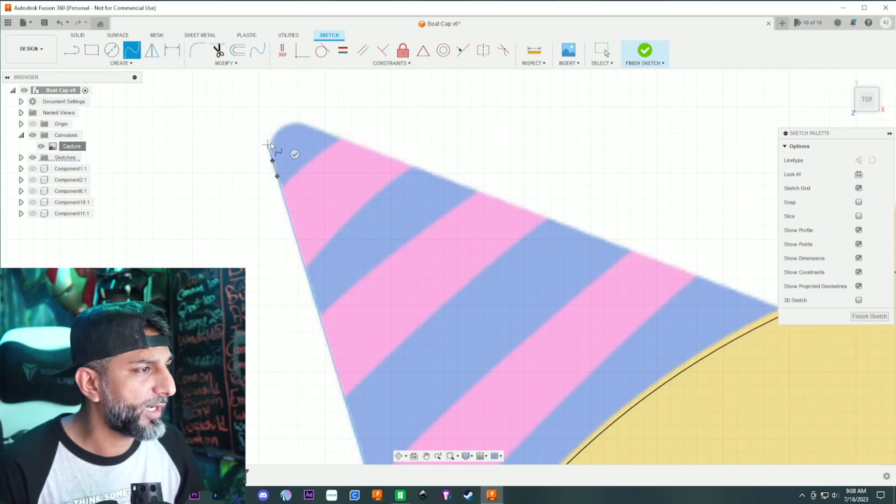I'm gonna hit this right here, and go probably about to like right here, and then hit the check mark. Then I'll pick this tool and just start kind of building my curve around it, and just like that, go over here.

Now these tools, we're going to utilize the mirror tool to build this, because what I'm going to do here is build the eyebrow, the eye, and the cheek on one side, then mirror it on the other side, and I'll show you guys how to do that.

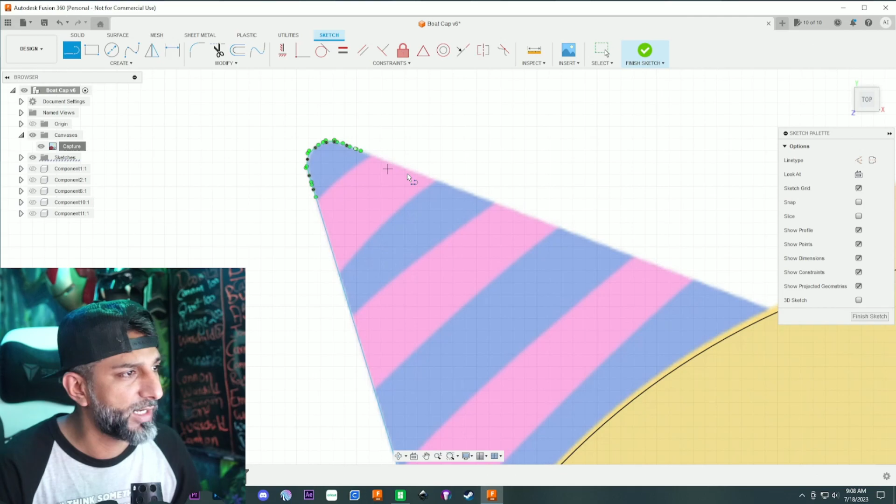I'm going to go back to my line tool, pick that, and bring this all the way down here. Now that we got that, I'm going to use this tool here, and from one side we're just going to kind of keep going.

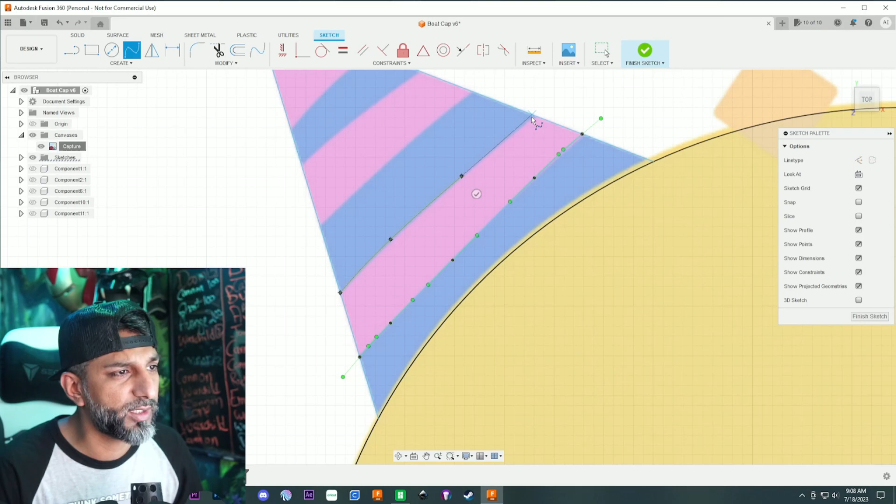I'm quickly showing this to you guys because I've already done this, but I felt like this was a pretty good design to quickly go through some of the basic things in Fusion of how to design something if you don't have a template or an outline to build it into an SVG. So those are my lines right there, and then this guy here.

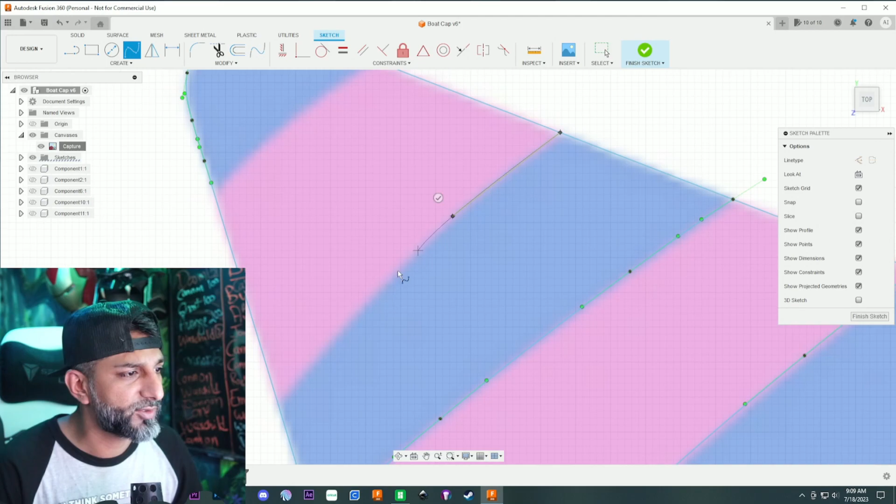As you can see, as long as you're getting it somewhat close, you're good. And boom, okay, so that's that right there.

Now I'm going to show you a quick thing of how I do these squares. I'm going to pick a line tool, go from here, go here, go here, over here, and probably over here.

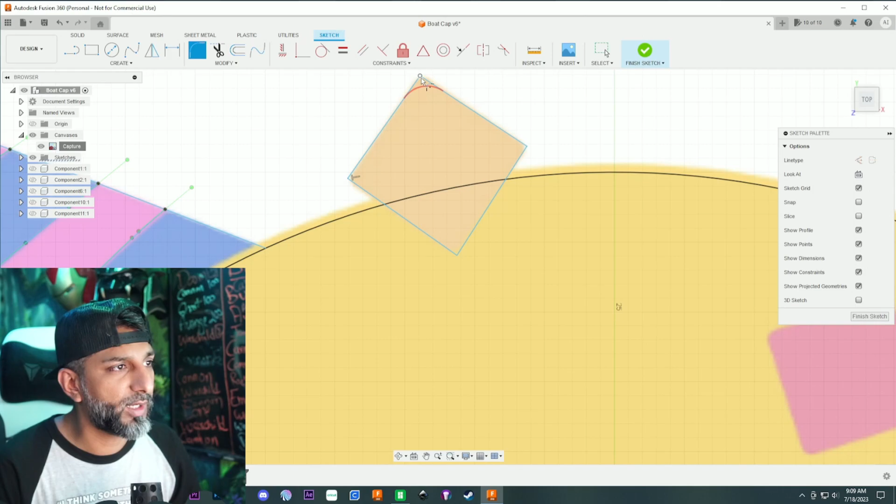And then I'm going to finish this off right there. Okay, then I'm going to take this fillet and round this corner a little bit. Okay, about how that square is. So right about, I think, there. Okay, then I'm going to click the other corner, then this corner, then this corner, and that gives me that nice rounded square right there. So I'm going to hit enter.

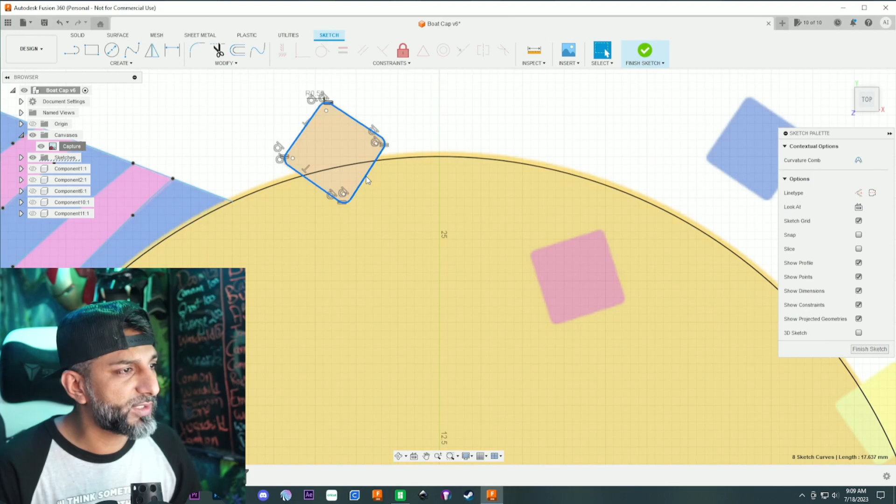Okay, now I'm going to double click the square. Okay, and I'm going to do Control C for copy, then Control V as in Victor. Then I'm going to grab this square and bring this here. And then I'm going to rotate it, right about there, and then bring that square right there. Hit enter. Perfect. Okay, now I got another square here.

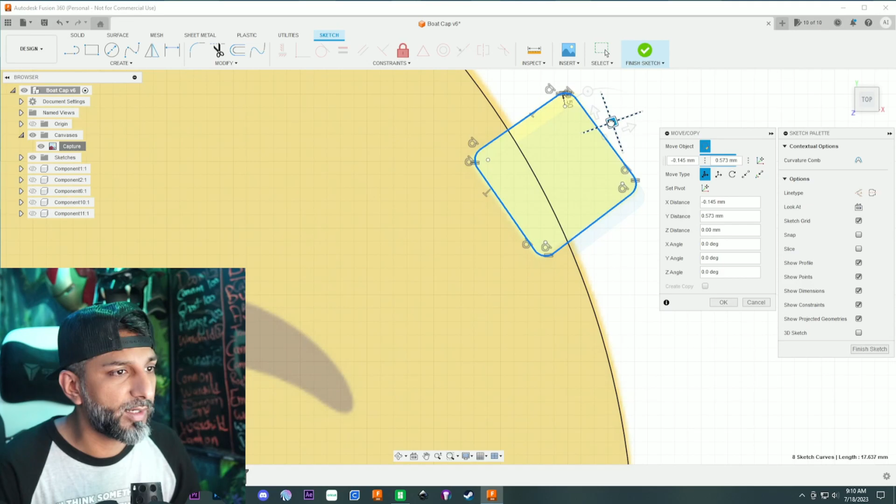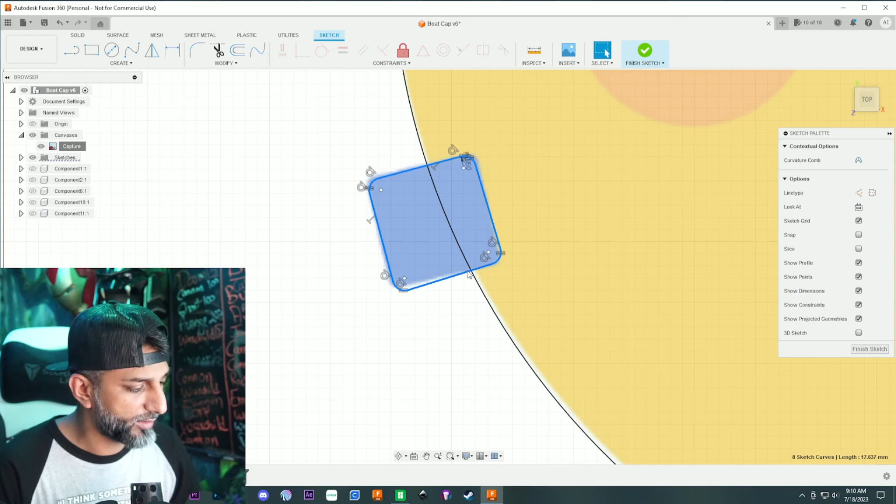So I'm going to click that, double click it again, Control C, Control V, bring that here, and then rotate, and then bring that right about there. Hit enter. Then I got three more, right? So double click that again, Control C, Control V, bring that guy here, and then rotate right about there, and then enter. And then C and V again, bring this down here and rotate, and enter. And then do that again, Control C, Control V, bring that here, and that's good right there. Okay, perfect. So now we got all the squares done.

We got the outline kind of done. All right, so let's build this eyebrow real quick, and I'm going to show you how we mirror this. Okay, so I'm just going to click. For the sake of the argument, like I said, I'm just going to kind of quickly design this, but you can kind of see how it's taking the shape of it, right? So there, boom, finish that.

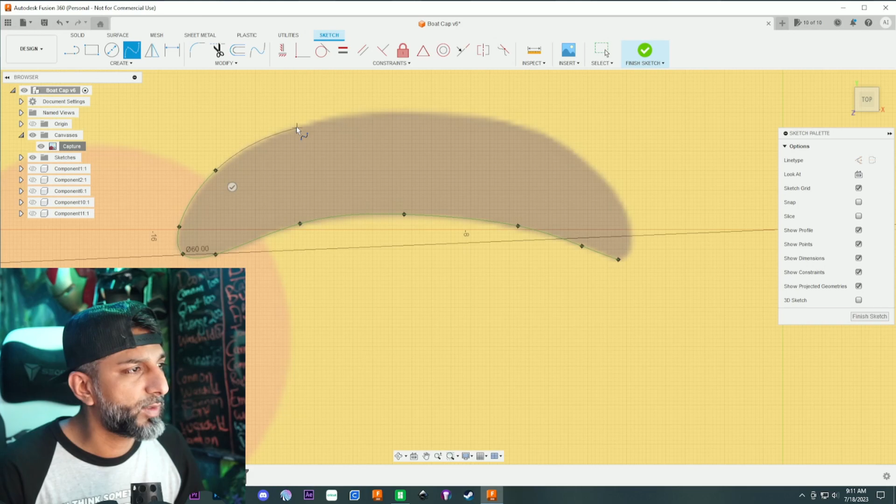We're going to come here, over here, and you know what? I'm going to time this too, to see how long a simple design like this really takes in Fusion. Because I used to be really scared of Fusion. I mean, Fusion used to scare the crap out of me, and I would do everything in Tinkercad if I could. And if I didn't have to touch Fusion, I wouldn't.

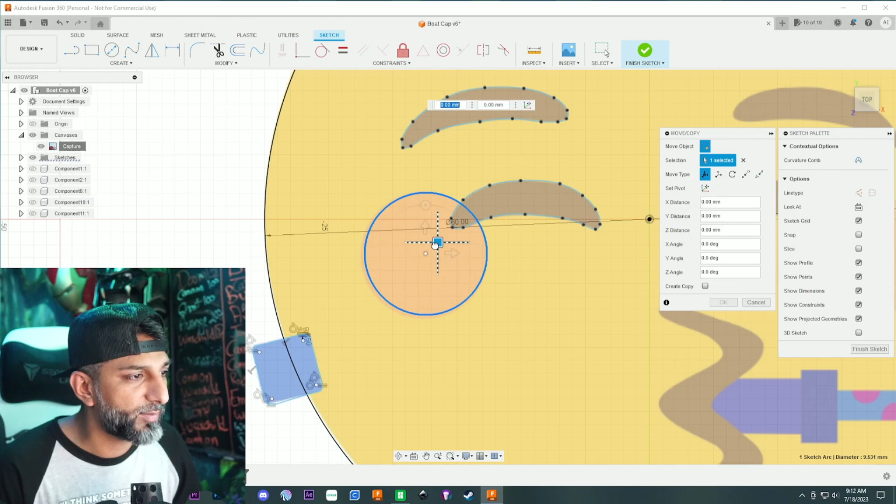So now that I built the square for the cheek right here, I'm going to select it and move and copy it, kind of lining it up pretty good with the cheek right there. I'm going to take this trim tool and trim this part of the cheek right here that goes inside. Okay, now here's how we do the mirror function.

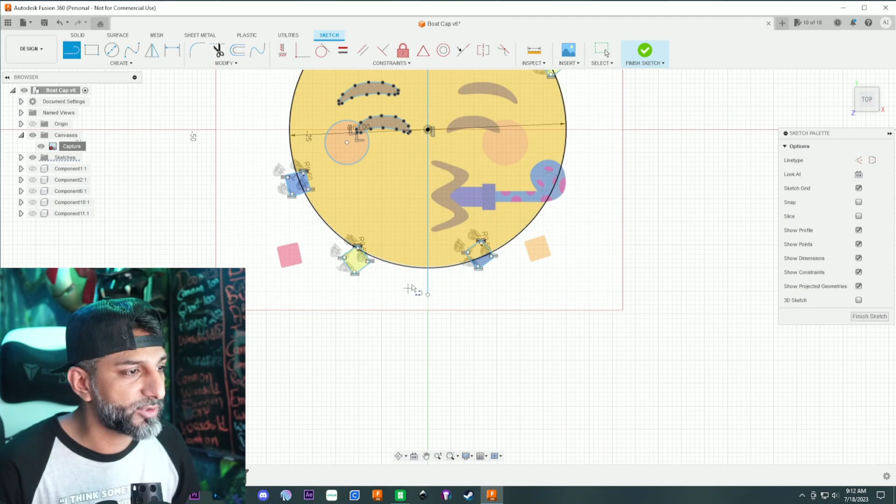So I'm going to take a line because we need a reference line where it's going to mirror. We're going to take that line and put it right through the center. Just put that line right there and hit the check mark. Then we're going to pick this tool right here, mirror, and put our objects 1, 2, and 3, and select our mirror line, which is this. And as you can see, it's bringing that right there.

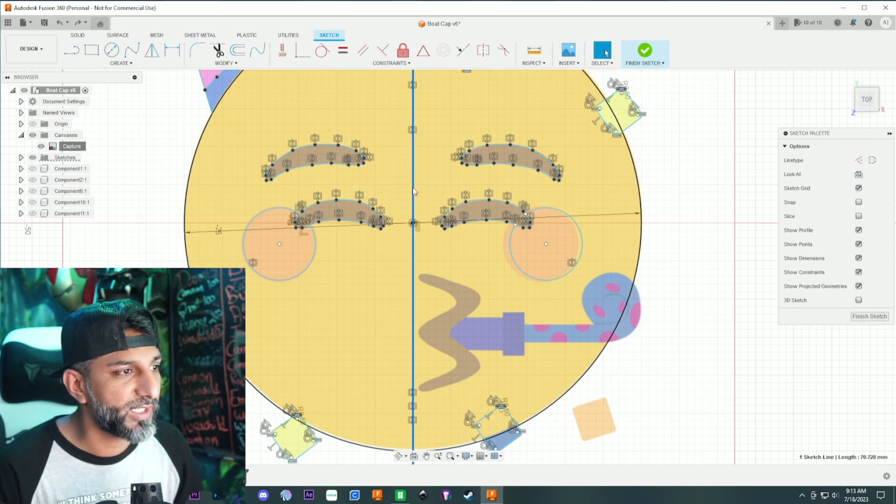Now it's not 100% there, but I'll show you how to move it. Hit OK. Now, if you try to pick this and manipulate it anyhow, like move and copy, because it's a mirror, the other side will move too. You see that? So here's how we get away from that. We're going to take our reference line that we made and just delete it. Now we can move it individually. You see that? All right, we got that right there.

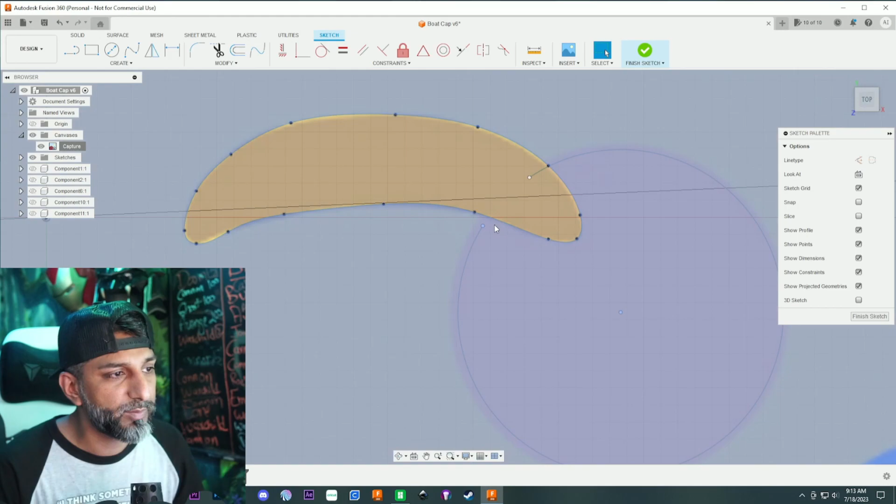This one probably right there, and this one probably right there. Okay, but now I got to make sure, because I moved it, that my lines are closing over here, right? So I'm going to click and click, close that line right there, and that line's already closed. I'm just going to trim it right there. Okay, perfect. We got the eyes, we got the cheeks, we got the squares. The only thing left is the mouth and the little blowy thingy right here.

So again, we're going to pick the squiggly line thingy right there, and then we're going to go here, quickly design this thing.

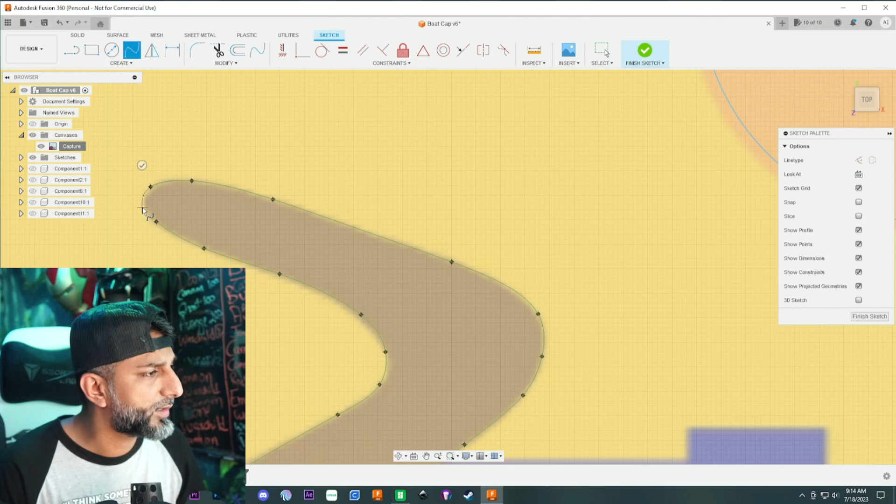Fusion isn't so scary, but like I used to be scared of doing this sketching thing. Once I got the hang of the tool, it's not so bad. Bring this here, and boom, right there. Right there, there, and we're almost done with the mouth. Probably gonna bring this right there, and right there. Boom. All right, we're done with the mouth.

Okay, now I'm gonna pick this line tool and go from here, down, down. And then I'm going to close this right here because these are the two different blues that I'm going to put over here. Over here I'm going to put a lighter blue. Over here I'm going to put a darker blue.

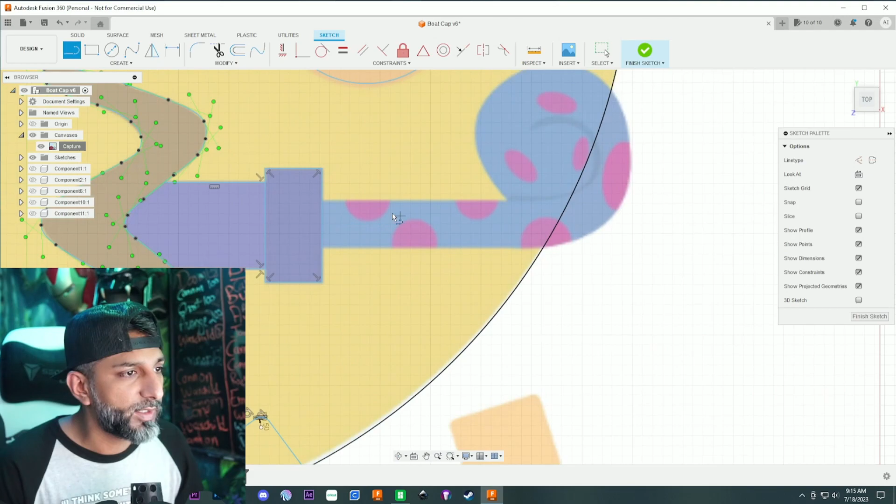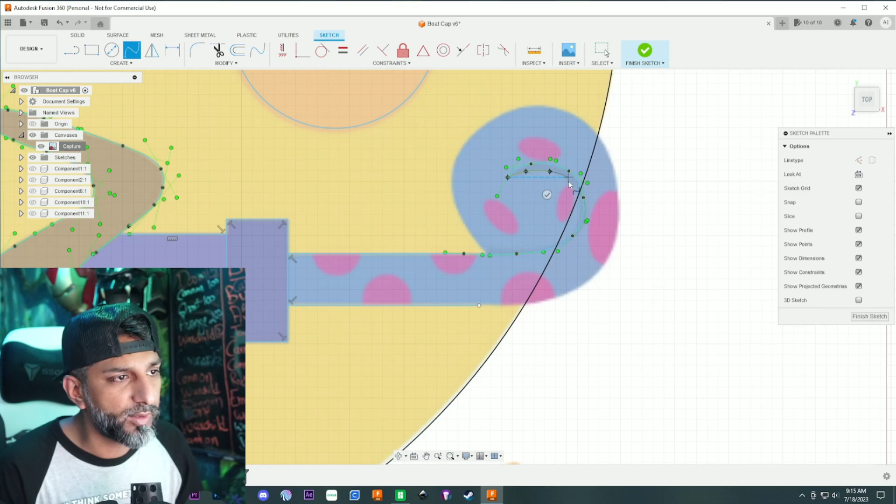Now the line tool, I'll just bring it down to here, hit the check, line tool here and here, hit the check. Then I'm going to go back to this guy and boom, boom, boom. I think I'm going to make a double line here because I want this to be able to show that it actually curves. If it's all the same color, it's not really going to show. So I'm going to kind of do this right here and stop that right there.

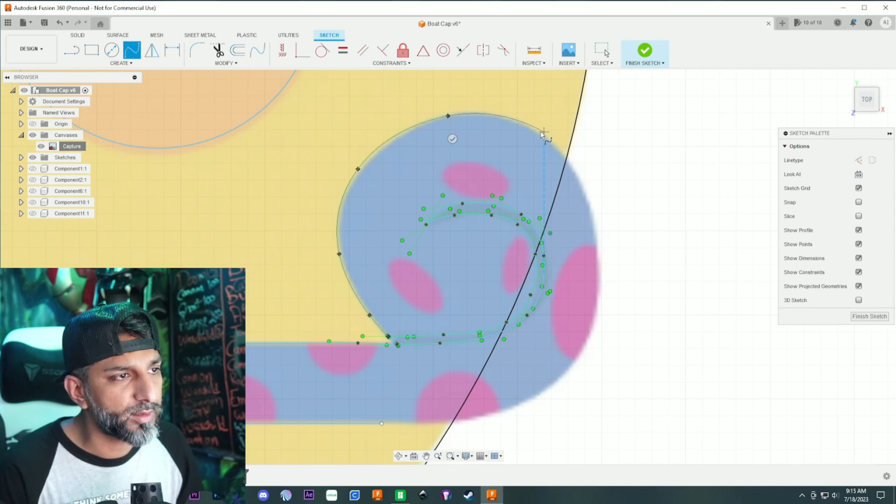And then bring this and close that. And then bring this and just kind of make this curve right here and here and here and here, there, and close it up.

Okay, now that we got that, I'm gonna make a circle tool and make these little circles right here. So select, and I'm gonna kind of just move and copy it to where the circle is, right about there. Hit enter.

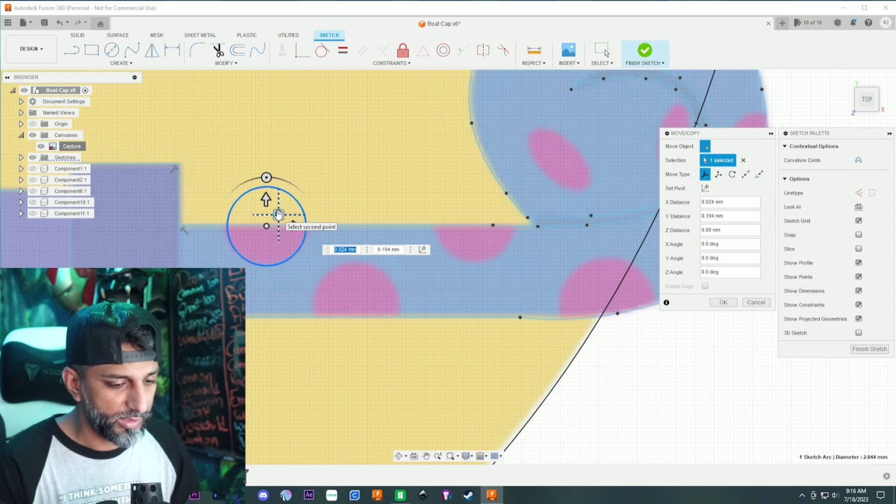I'm going to do copy paste, bring that circle here, enter. I'm going to do copy paste, bring that circle here, hit enter. And I think one more, right? So copy and paste, and then bring that circle here, and hit enter. But this one I'm gonna make a little bigger.

Okay, now I can go ahead and trim these things, right? So trim the outsides of these circles. Okay, boom, boom.

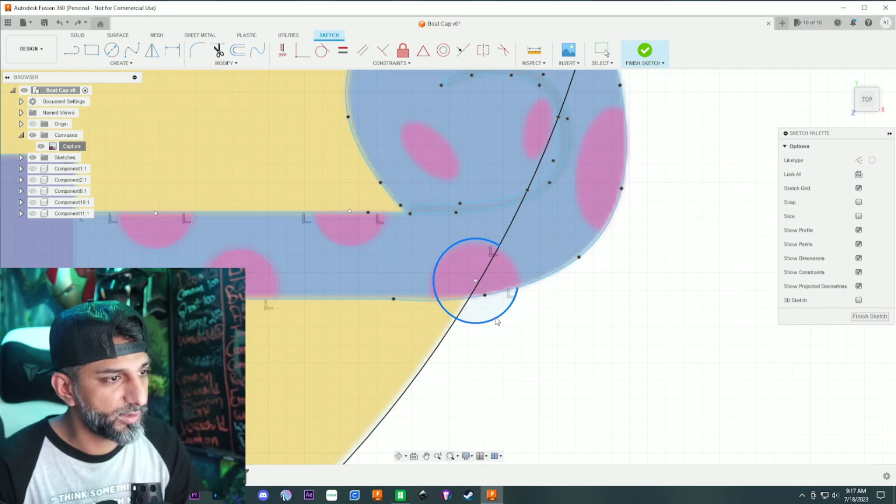Actually I didn't mean to, I did this one wrong. Oops, I went too far. Okay, that circle, that circle, that circle. This circle is messed up right here, so we're gonna delete that. I'm gonna bring in a circle and just redo this circle right here.

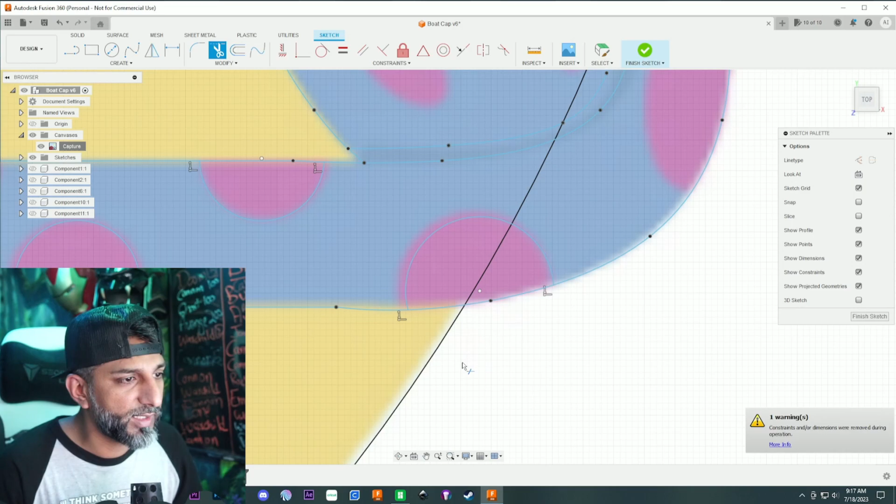Okay, so right there, and I'm gonna trim. Why is it doing that? Okay, I'm gonna trim this and this, and okay, that's as far as the circle goes. Then I'll trim the rest of the stuff and I'll show you what I'm going to trim.

Okay, so now I'm just going to finish these up. I'm just going to take this and boom, boom, boom, close it up right there. I'm going to build this guy right here. Boom, boom, boom, boom, boom.

Like I said, I'm not being too cautious with the lines because at the end of the day, if you can really take your time with it, but if you want to quickly make something, this would work too.

Okay, boom, right there, I'm going to trim that extra line right there. Oop, oh no, that didn't come out good. I'm going to redo this one real quick. And boom, boom, boom, boom, boom, boom, boom, boop. And then the last one here. And there, there, there, there.

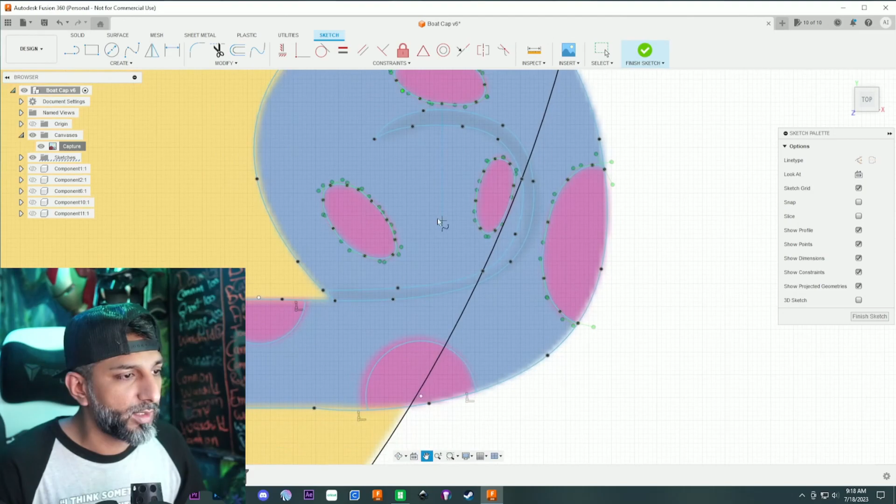Okay, now that I got all that, let's start trimming some of this stuff. I don't want this, if you can see, these lines are overlapping each other. Let me take care of some of this stuff so it's not so crazy looking. See how this is overlapping each other.

If I was to bring this picture in, you guys will see how I'm gonna do this. Okay, so this square, I don't know if you can see that, this square goes over top of the face. This square goes over top of the face. This one goes over top of the face. This one goes behind, and this one goes behind, right?

So let's do the behind ones real quick. I'm gonna take that back over there. I'm gonna trim this. So these squares are behind the face, so I'm gonna trim everything in front of it. Same thing here, I'm gonna trim that, trim that, trim that.

And for this one, these circles were on top, and these squares were on top of the face. So I'm going to trim the face line here, and I'm going to trim the face line there.

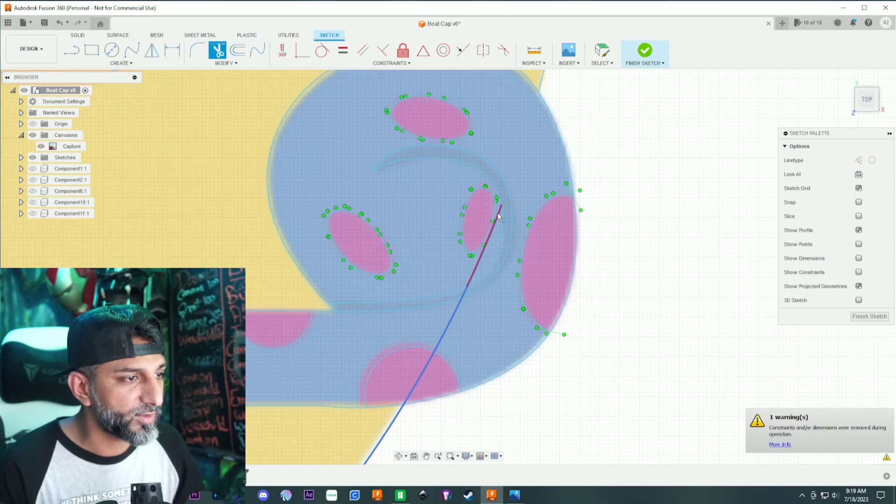Okay, so now we got these circles. This face should be behind all of this stuff, so I'm going to trim that face line. And boom, right there. What else do we got? That looks actually pretty good.

Okay, here's what we're going to do. We're going to hide the canvas, and now there's our sketch. We're gonna lock all the constraints. Okay, now we get to the fun part.

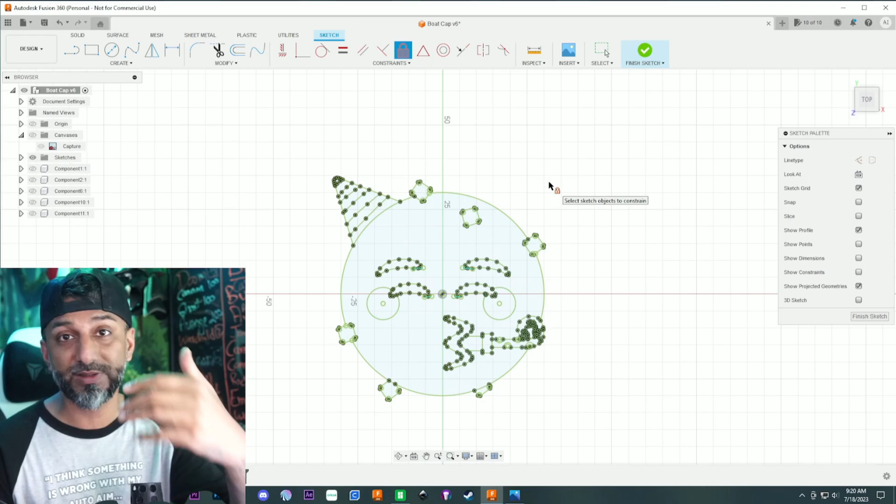Now we get to export all of this, or actually build it into components, and you're gonna see why components. Then we're gonna export it into a step file, and you're gonna see why that. Then we're gonna color it up in Fusion, in Bambu Slicer, and then we're gonna print it out, right?

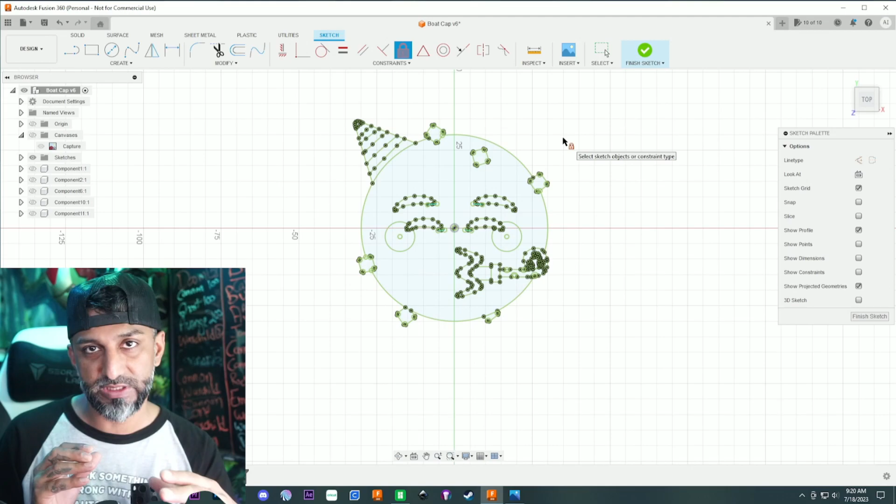So here we go. The person wanted 6mm thickness, okay? So I'm gonna highlight the whole thing. I know exactly how I'm gonna build this. I'm gonna have 5mm of it yellow, and then I'm gonna have 1mm doing all the color changes, okay? And I'm gonna print that upside down.

So here's how we're gonna do this, okay? I'm gonna highlight the whole thing. I'm gonna finish the sketch. I'm gonna highlight the whole thing again. I'm gonna do E for extrude, -5, okay? I always say -5 and a new component, and here's why. I'll show you why, okay?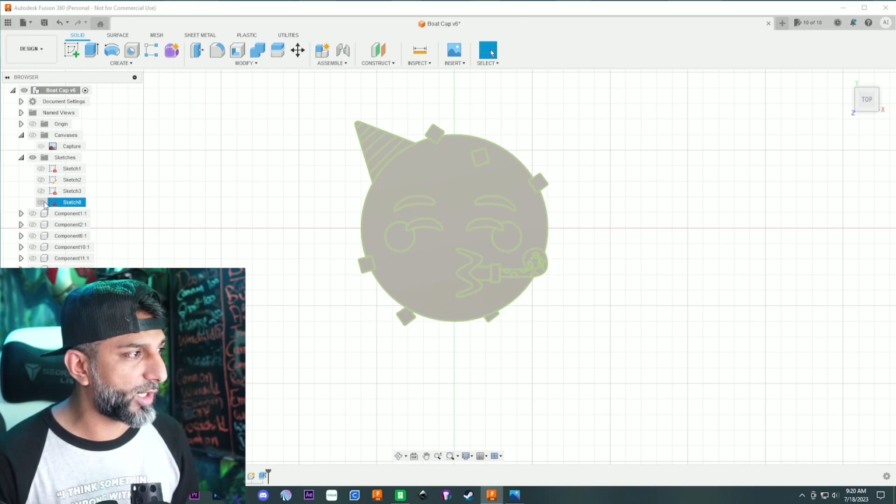You're gonna go back to your sketch and we're gonna unhide our sketch, okay? If you don't do -5, if you don't build the body behind the sketch, you're gonna lose this ability to select the faces, okay? I'll show you. I'm gonna go back, and if I did just E for extrude and 5mm, bring the sketch back, I can't pick the sketch. You see, I can't highlight the profile of the sketch, okay? So that's why I like to build behind the sketch.

So I'm gonna go back, and then again, we're just gonna highlight everything, E for extrude, -5. Okay, so that's my solid body on the back, okay? I'm gonna unhide the sketch.

All right, now I'm gonna come over here. I got the picture on the side, and I'm looking at it. All these blues is gonna be one component, okay? So these guys here is gonna be one component. This magenta looking thing is gonna be a component by itself.

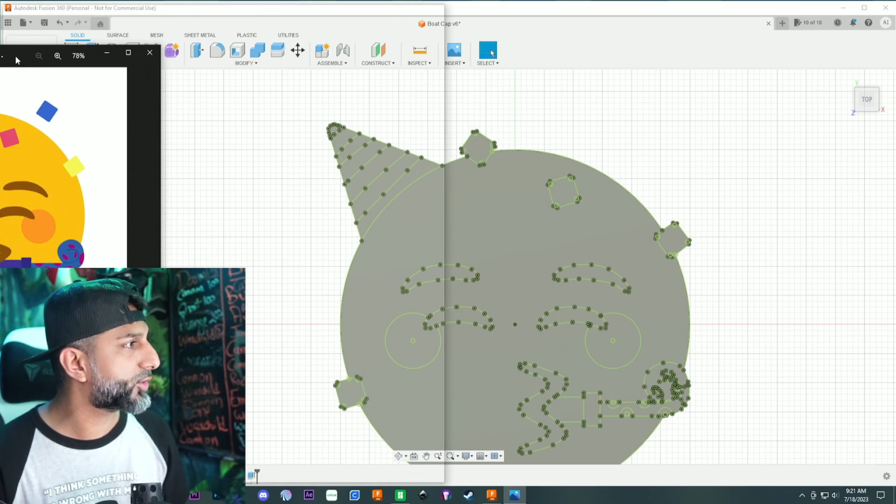These I'm gonna do pink. That's gonna be a component by itself. The cheeks are gonna be a component with this guy right here. So I'll show you real quick. I'm gonna put the picture on the side, and I'm gonna start working on this.

So we got this. I'm gonna hit E for extrude 1mm, because now I want it above the sketch, okay? New component, and this guy, that guy, and then this blue, and then this blue are all the same color, okay? I'm gonna hit okay.

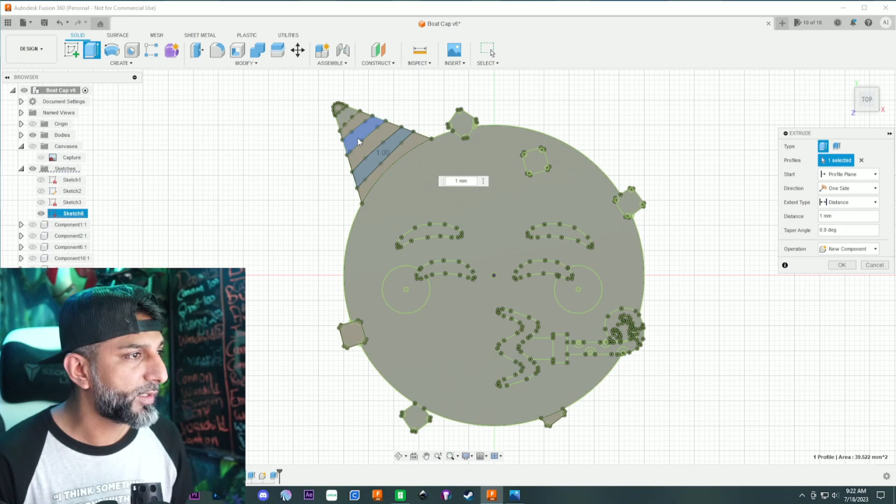All right, now I'm gonna do the pink looking thing. So this is pink right here, E for extrude 1mm, new component, this guy, and then these things I want pink. 1, 2, 3, 4, 5, 6, 7, 8. Okay, all of these are going to be the same color.

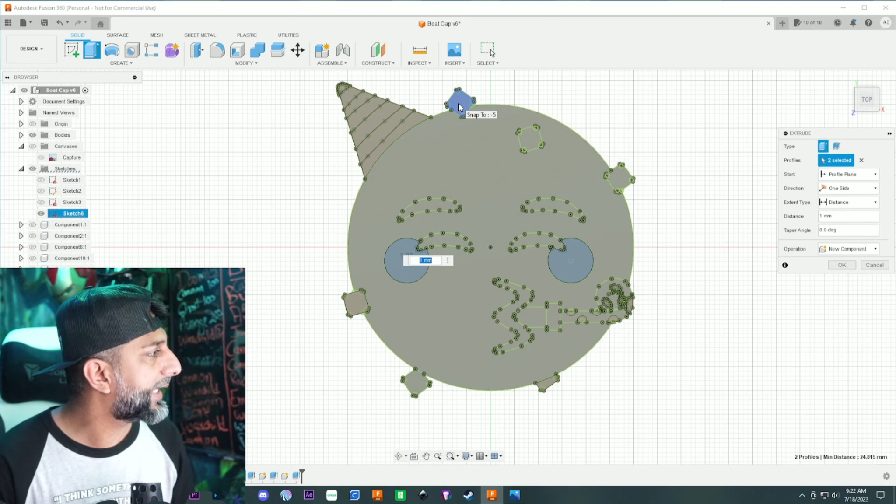Perfect. Now we're gonna do the oranges. The cheekbones, one new component, this guy, and this guy is gonna be orange. Boom. This is magenta by itself, so I'm going to do extrude 1mm, new component, done.

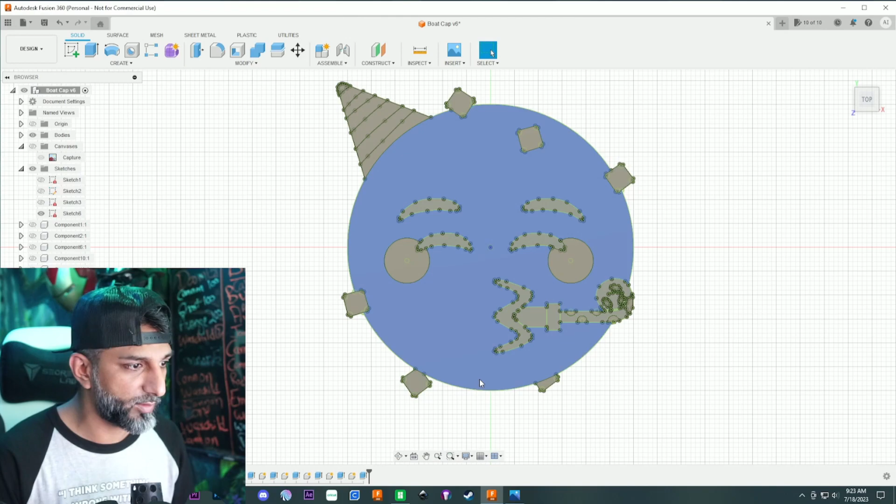And these two colors, what am I going to make this? I don't know what I'm going to make this, so I'm just going to put 1mm, new component, and this guy down here 1mm. Okay, we got all the squares done.

All right, let's do the eyebrows. The eyebrows and the eyes I'm just going to do black. So I'm going to do new component, so I'm going to do all of this, and the mouth, one component. All that's going to be black.

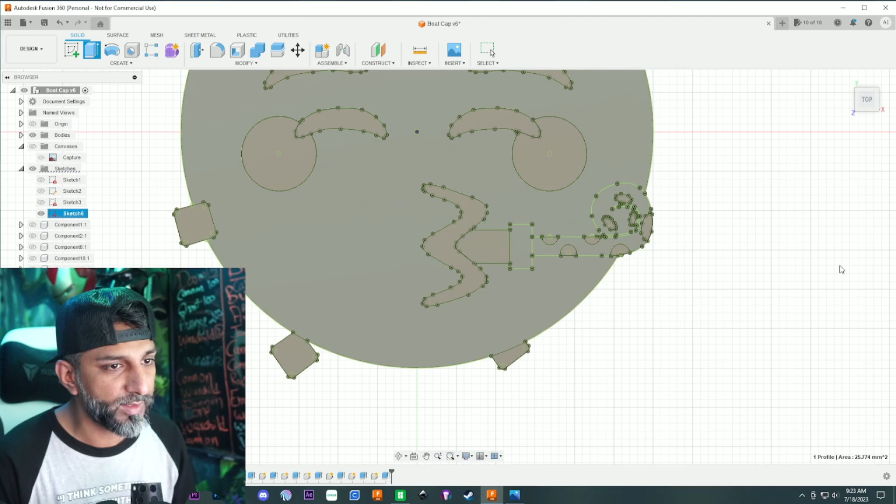Okay, now let's do this little whistle looking thing. This one I want a different blue, so I'm going to extrude, new component, right there, and these two I'm going to want the same color. New component, this guy right there, and yep, right there.

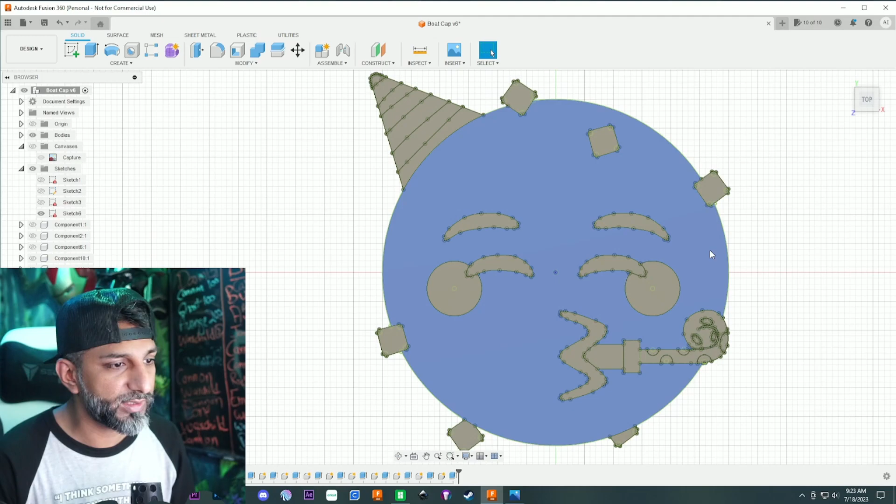Okay, this one I might do black, I don't know yet, so I'm just going to do a new component right there for the space. Okay, we got the whistle, we got the eyes, the eyebrows, the hat, everything. So the only thing that's left is the face. Extrude 1mm and new component, and boom.

Theoretically our thing should be done now. Okay, look at that. Now when I hide the sketch, everything should be done. It should be 6mm. Okay, and we calibrated it with a picture of 60mm, right? So it should be right about there.

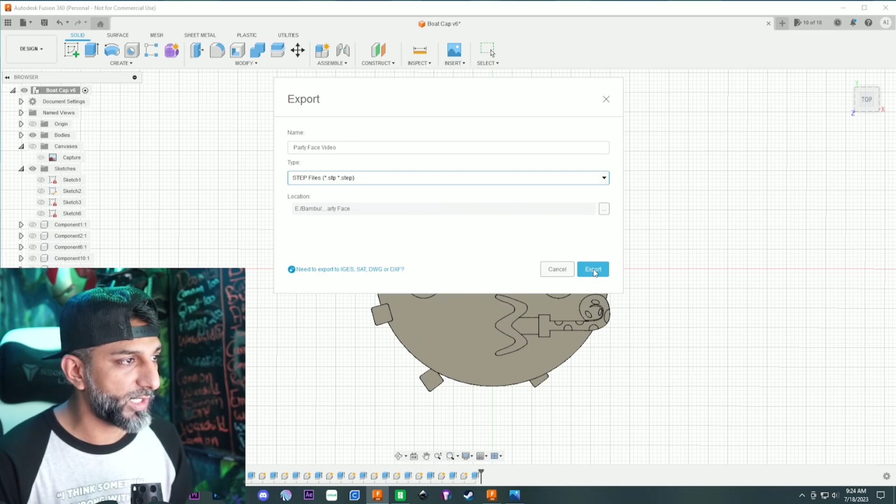All right, so we're gonna export this, and we're gonna call this party face video. Okay, and I'm gonna do a step file, and I'm gonna save it in the party face folder. So party face video, we're gonna export this. So let's go here. All right, let me bring this in, party face video right here.

Okay, so there's our party face. If you look at the size, look at that, 62.2. So we're kind of right about there because of the hat and everything. Okay, so let me move this over here.

I've got my palette kind of set over here. Now, yes, this is for, you know, with 2 AMS Bambu. I have two AMS on my X1 and I have 1 AMS on my P1P, so I can work with 8 colors, right? So I've got my color set up right here, and here's how we're easily gonna do it.

We're gonna come down to the objects. Okay, first of all, the main thing. Now I'm hitting my number keypads as I'm picking the color. So if I want yellow, I'm gonna hit 2. If I want magenta, I'm gonna hit 4. Okay, so the whole thing I wanted yellow, right? So I'm gonna make the whole thing yellow.

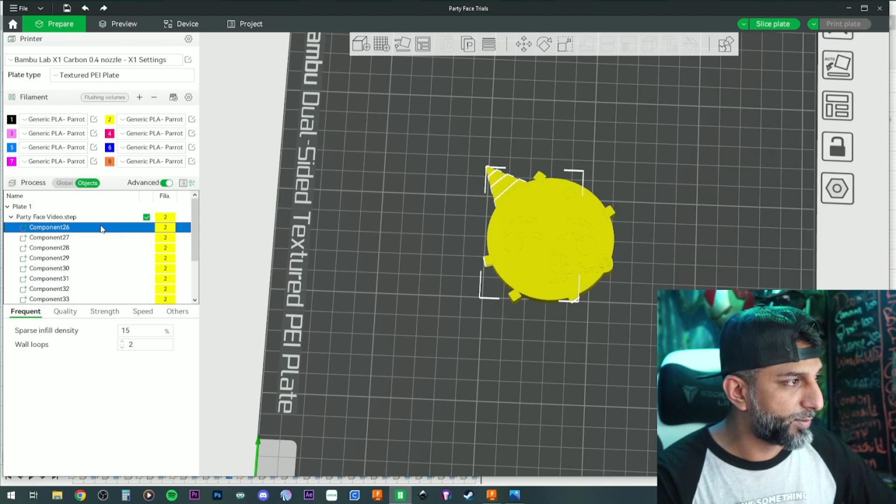All right, so component number 1, this is blue, that I wanted number 5. Okay, I'm gonna go down. This was pink, so pink is number 7. Go down, and now all of this is being colored 1 millimeter because we made the component 1 millimeter, right? So it's easier this way for me than coloring. Plus, it kind of makes sure I don't have any bleed through or anything.

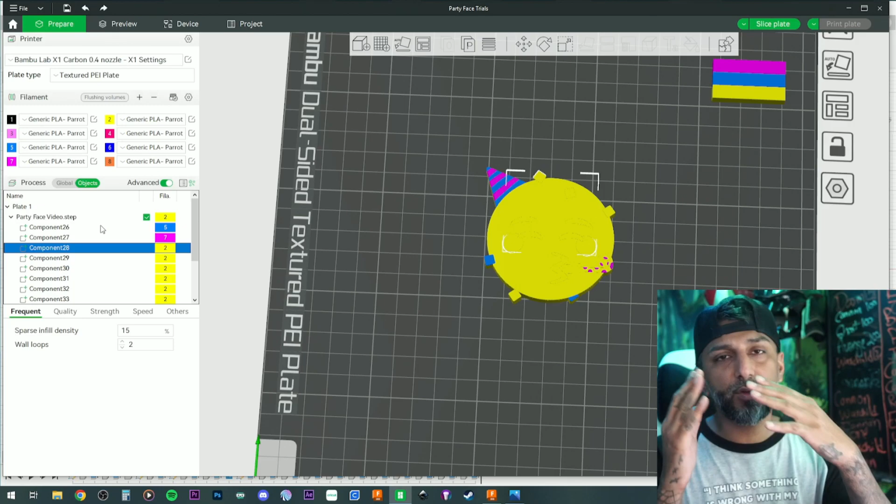So I can kind of choose, because if you do the paint function in Bambu Slicer, it only does 3 layers of color. Okay. So that's why I don't kind of like that, because we can have bleed throughs or whatnot. So this way I get to kind of control how thick my colors are going to be.

Okay, so this guy here, these are the cheekbones. They were going to be orange. This square here was magenta. I believe these 2 squares, I don't know what they were, but we'll just make them orange or something, whatever. And we're gonna make, actually, maybe blue, maybe pink, something. Sure, pink. Pink looks good.

Okay. The eyebrows and the eyes, we're gonna make it 1 black. We're gonna make this whistle the darker blue, then this whistle the lighter blue. Okay. And then we're gonna come down that. I'm gonna make it black, and then that's it. So this is it, pretty much, right there. That's how easily we colored it in the Bambu Slicer.

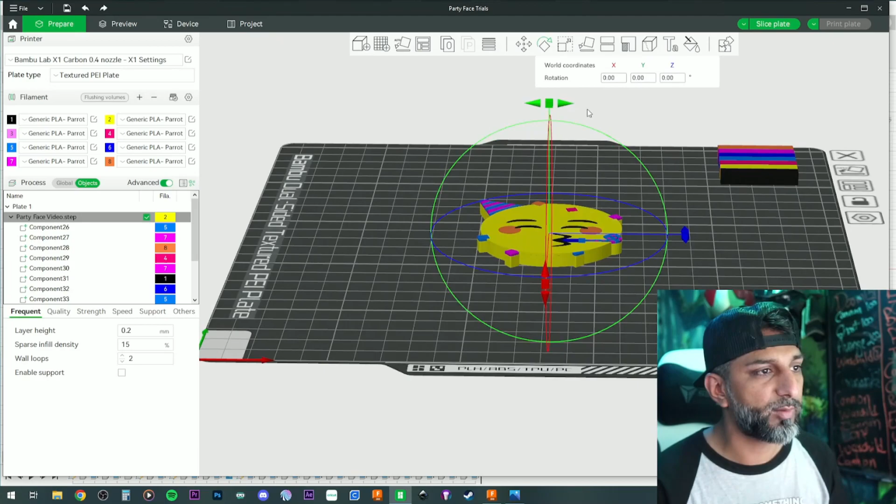And then what I'm gonna do is I'm gonna take this. I'm going to turn it upside down because I have the texture plate, and it's going to come out looking really good. Okay. And there it is.

1 hour and 28 minutes, 32 filament changes, because what it's going to do is it's going to come down here, and first layer, second, third, fourth, fifth. All of these 5 colors are going to be colors. Okay. Different filament changes. Now it's going to build the rest of it up with the yellow, and it's going to finish it up. Okay.

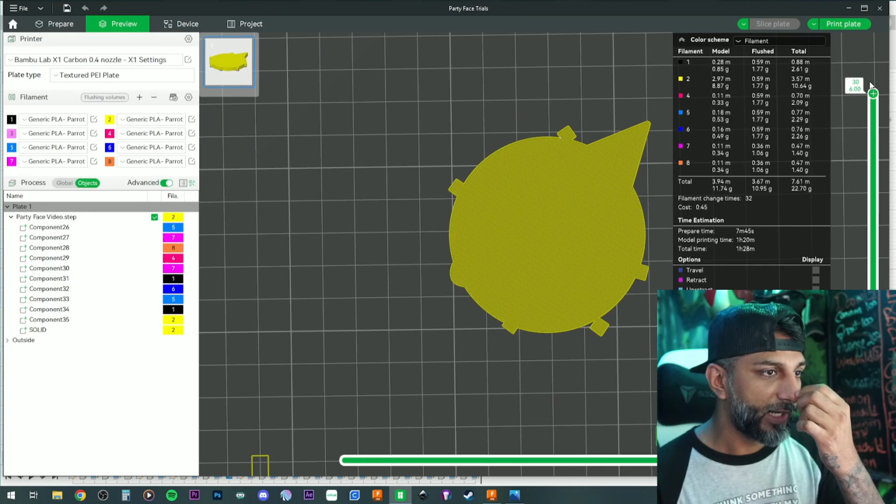So let me print this. Let's see how it comes out, and then we'll come right back. Okay.

All right, here we go. Not too bad, right? It actually came out pretty good, and it's got a nice texture on the top because I printed it upside down on the textured plate. So yeah, there it is.